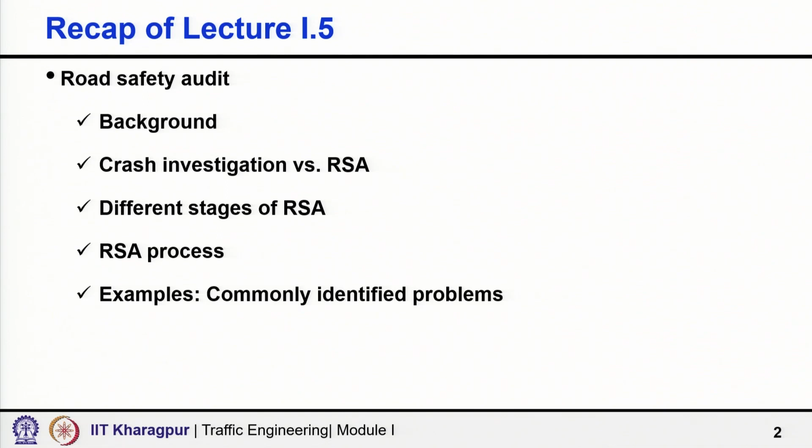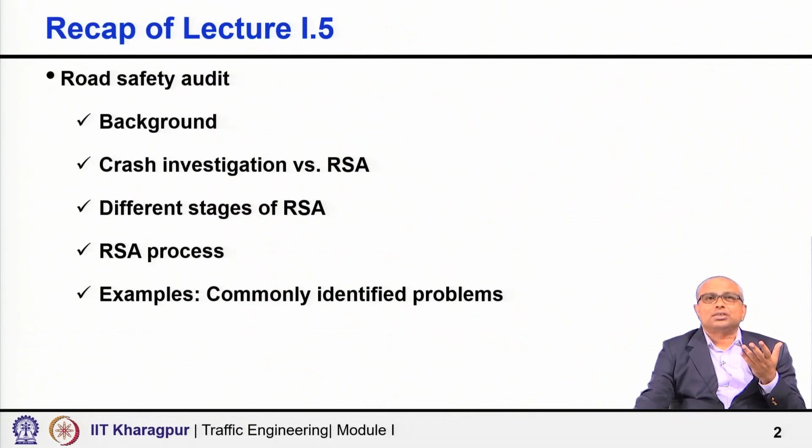In Lecture 5, we discussed road safety audit - what it is, why we need it, the difference between crash investigation and road safety audit, the different stages where road safety audit may be applied, starting from feasibility stage to preliminary design to DPR, during construction, and then operation and maintenance. We also discussed the road safety audit process and indicated some common deficiencies we normally find when we audit roads in India. With this background, today we shall discuss the safe system approach.

A safe system approach within road transportation system is built around the premise that death and serious injury are unacceptable and are avoidable. We are saying that death and serious injury are unacceptable and are avoidable.

Second, it is recognized that road users are human beings and therefore they inevitably make errors. All of us make errors, and such errors may also lead to a crash. But the human body can only withstand a certain level of kinetic energy before a crash results in death or serious injury. So first point: fatality and serious injury, particularly leading to permanent disability, are not acceptable and may be avoided.

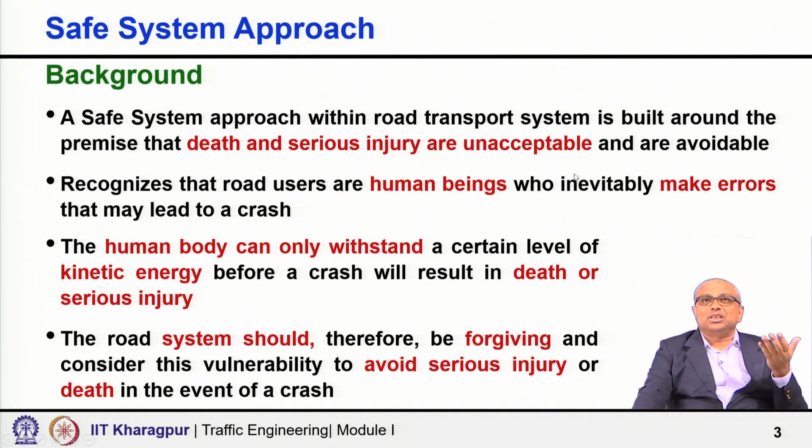Second, accept that humans make mistakes. Third, humans are vulnerable - only a certain level of kinetic energy can be tolerated when a crash occurs, to decide whether fatality or major injury will result. These three I mentioned in the first slide itself: human beings make errors, the human body can withstand only a certain level of kinetic energy before a crash results in death, and death or serious injuries are unacceptable. So these are the first three.

Fourth, responsibility is shared. What do I mean by that? All stakeholders together must ensure that crashes do not lead to fatal or serious injuries. We cannot simply blame the road user - saying it's the road user's fault, so he or she died. We cannot say that. Yes, it is obviously the responsibility of the road user - if you are a driver, it is your responsibility to drive safely, following the rules and regulations, speed limits, with a proper driving license. The same is true for a pedestrian as well.

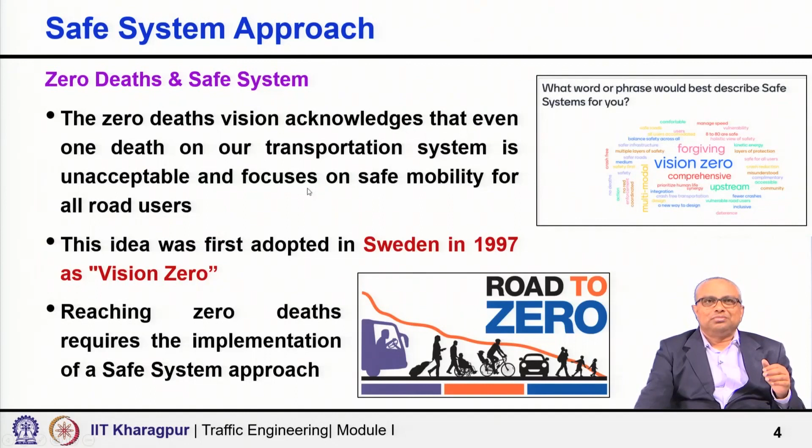Last, redundancy is crucial. What do I mean by that? Reducing risk requires that all parts of the transportation system are strengthened, so that if one part fails, the other part still protects people. That is why it is called a system - everybody together, like a team.

I should give driver training properly and only then hand over the license to a driver. So driver training has to be proper, enforcement has to be proper, road design has to be forgiving in nature, post crash care has to be excellent. Only when multiple things fail does fatality happen. Otherwise, if the driver is not proper, the road will take care of it. If the road is not so good, maybe enforcement can take care of it. Even if a crash occurs, maybe speed management should have taken care of things. Even if a crash occurs, immediate post crash care could save the life.

So redundancy is crucial. Reducing risk requires all parts of the transport system to be strengthened, so that if one part fails, the other parts still protect people, and at the end of the day we are able to achieve a state where, eventually in the long run, we eliminate fatality and serious injury.

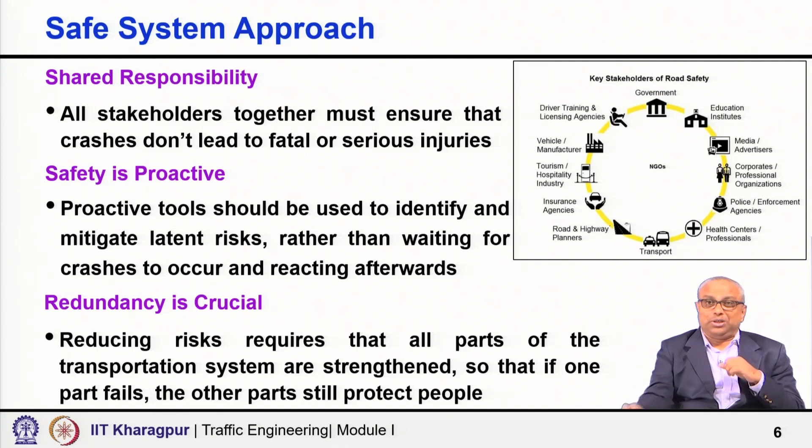A quick comparison between the traditional approach and the safe system approach. The traditional approach, directly or indirectly, assumes that traffic deaths are inevitable - we forecast fatality and how fatal accidents change with various factors. Of course there could be other reasons for doing such forecasting or modeling, so please don't take my statement negatively. But it's as if deaths are inevitable - people say drivers are unruly, pedestrians do not know anything, and in this system obviously deaths are inevitable.

Some deaths will occur, but the safe system approach, or Vision Zero, considers that traffic deaths are preventable. The traditional approach attempts to prevent crashes, fine, but the safe system approach prevents fatalities and serious injuries - even if a crash occurs, it should not lead to fatality or serious injury. The traditional approach considers improving human behavior; the safe system approach says design the system for human mistakes or limitations, and create infrastructure which is forgiving in nature.

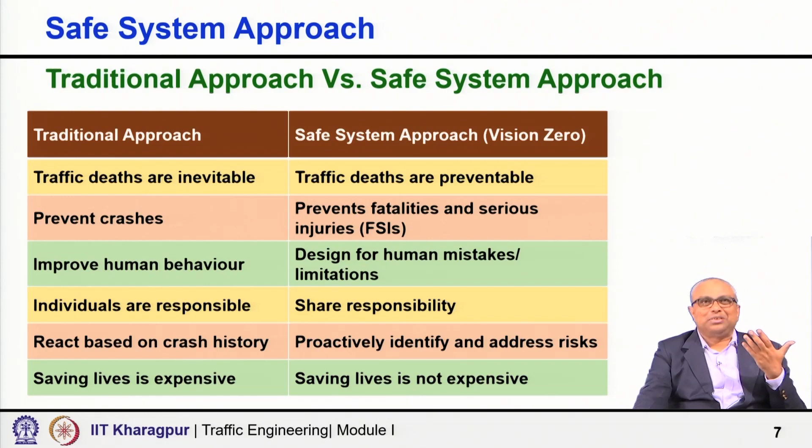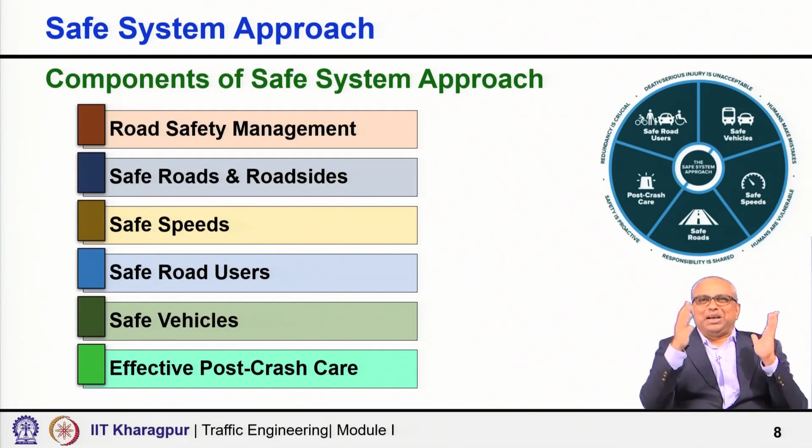Coming to the next, what are the components of safe system approach? There are traditionally 5 pillars, 5 major components. Recently, people also consider road safety management as another component, which in some way integrates all the 5 components together. Traditionally people consider 5 elements: safe roads and roadside, safe speeds, safe road user, safe vehicle, and effective post crash care. These are the 5 fundamental components, and overall road safety management can be considered as a bigger umbrella.

Coming first to road safety management, it is the key enabler for delivering safety interventions. Certain key elements of good practiced road safety management may include, for example, adopting a safe system approach to addressing road safety. The whole approach, the overall team, is working based on the safe system approach.

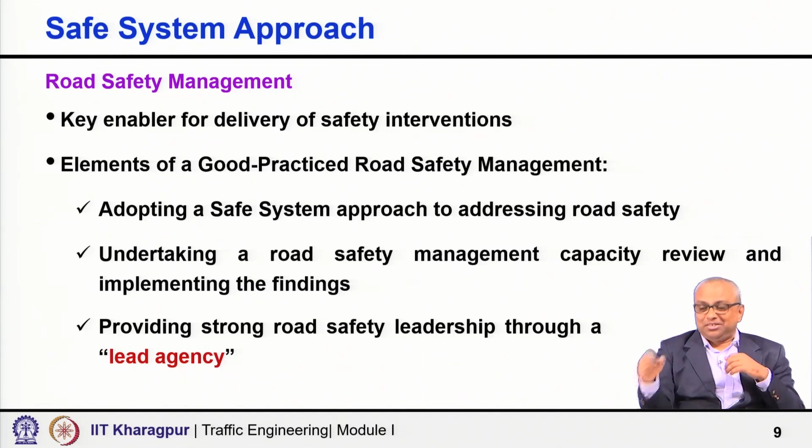Second, undertaking a road safety management capacity review and then implementing the findings. Third, providing strong road safety leadership through a lead agency. If you go state wise, every state, it is a joint responsibility. Multiple departments of government are involved—health, education, transport, enforcement. Road development departments also, may be urban development authority, public works department, so many others, panchayat and rural development department, they also build roads in many states in India. But we need a strong lead agency, so providing strong road safety leadership through a lead agency is very important.

Establishing a road safety management framework with key performance indicators, clearly identified, including the requirements for data collection strategies to effectively plan and monitor road safety activities and outcomes. All stages—data collection strategies, effective planning, monitoring—everything is included. Also building road safety capacity across the sectors, and finally, developing and adopting ambitious strategies and road safety targets with regular reporting on progress. We need to set targets, but only setting targets will not help. There should be a strong leadership, a lead agency must lead it, plan it, monitor it, and regularly review the progress, whether we are able to really achieve it.

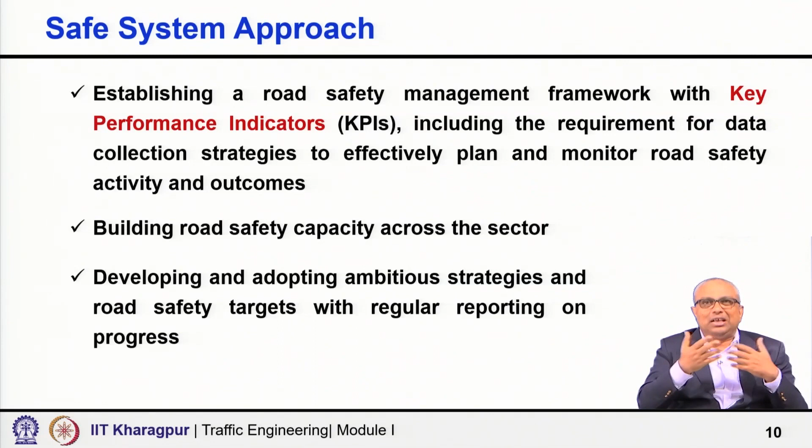Next, safe roads and roadsides—infrastructure interventions to improve safety outcomes by eliminating fatalities and serious injuries. We want infrastructural interventions, what all we can do with the roads and roadsides to ensure that we eliminate fatality and serious injury, all infrastructural interventions to create safe roads and roadsides for all road users.

So basically designing to accommodate human mistakes and injury tolerance—we say infrastructure itself has to be forgiving in nature. We cannot say that we have simply built the road, the blacktop surface is very good, pavement condition and geometry are good, and I have done my job. No, we have to ensure that we are creating safe roads and roadsides. The road development agency cannot think it has done its job just because it built the road. The engineering part, creating good pavement and surface condition, is not the only thing. We have to think of road users, all age groups, and their safety.

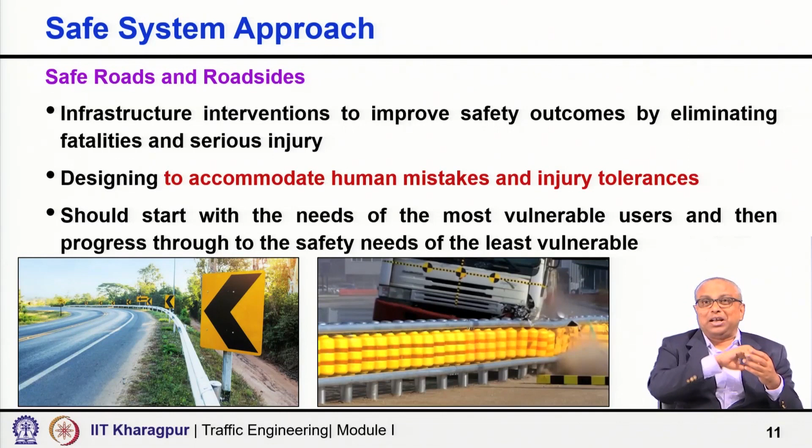This could be a challenging task, especially in low and medium income countries, because we have a diverse traffic mix, low user compliance level, and different multiple authorities having their own power—police may do something, transport department may do something, local authority or local administration may decide to do something, multiple levels of hierarchy, very difficult and challenging. But we should be able to address those challenges effectively to create a better and safer road environment as per the safe system approach, if we want to reduce road fatality and improve the country's performance.

Several examples are there, we will discuss in more detail. I have one more lecture where some interventions will be shown. But here are some quick examples. What could be interventions related to safe road and roadside? Many things are possible; I have mentioned a few here.

Roadside and central barrier systems on high speed roads - the moment we think of high speed roads, we must have these barrier systems. Then physically separating vulnerable users from other road users. We know the human injury tolerance criteria, so how we can segregate, create footpaths, walkways, safe walkways, segregated walkways, safe crossing facilities. If there is a bus stop, how will people cross? If there are market areas, people will walk, use bicycles. So physically separating vulnerable users from other road users - any intervention will come under this category.

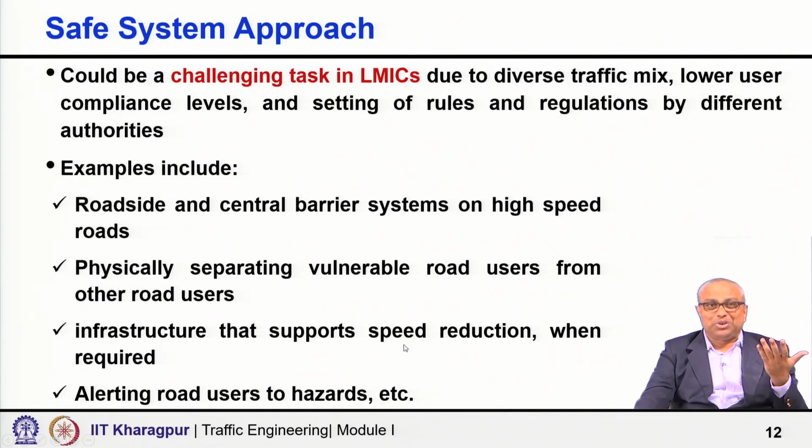Next, safe speeds - very, very important. Humans are unlikely to survive high speed crashes, as I mentioned with human injury tolerance. All over the world, people are recognizing and accepting this.

Reducing speeds can accommodate human injury tolerance in three ways. First, reducing impact forces - obviously if speed is reduced, the impact force is less. Second, providing additional time for drivers to stop - I see an object, want to stop, I get additional time. Third, improving visibility. Particularly in the Indian context, where anywhere and everywhere people are crossing the road, and school children may come straight onto the carriageway or try to cross without looking at traffic - a driver has to be vigilant about the roadside and environment. So reduction in speed can help there.

Also, depending on the impact speed, the death risk, serious injury risk, and slight injury risk will change. You can see that as speed increases, the death percentage risk is increasing. So higher speed means higher fatality - directly related. From 30 to 60, the percentage risk increases from 10% to 95%.

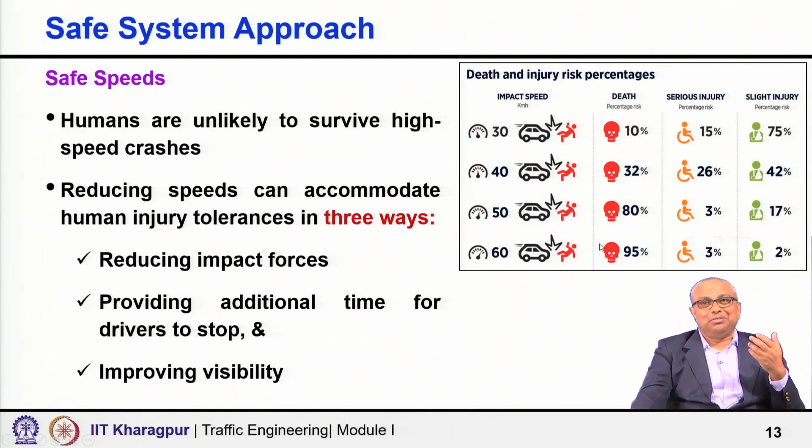Just imagine a single factor so powerful - we must recognize this. There is a direct causal link between speed and safety outcomes. Here too it is shown: fatal crashes, serious injury crashes, minor injury crashes - you can see the maximum gain we can get in terms of reducing the risk of fatality. No other risk factor has such a substantial and pervasive impact on safety as speed. It impacts both the likelihood of a crash occurring, which also gets reduced, and the severity of the outcome, which is again very important.

If infrastructure cannot be improved in the foreseeable future and a road has high crash risk, then managing speed can be a crucial alternative. So design the roads and make all features such that traveling at higher speed is not even possible. If you cannot do that, then speed management, supported by appropriate and competent enforcement to ensure compliance, is very crucial - because it can bring a lot of benefit, especially in reducing fatal accidents, or even reducing fatality.

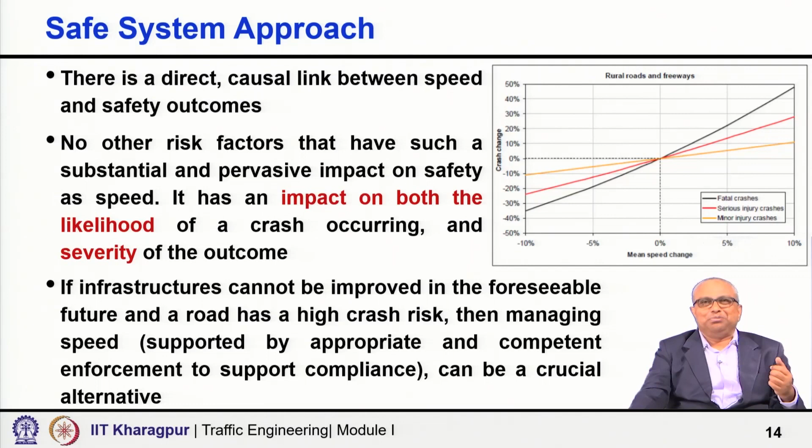Next third, going to safe road users. The safe system approach addresses the safety of all road users, including those who walk, use bicycle, drive, ride transit, or even travel by other modes. Safety for all road users.

Now, maximizing road users' behavior that is compliant with road rules is an important issue. Human errors, rather than deliberate illegal behavior, is an important contributor to fatal and serious crashes. The illegal behavior or deliberate violation is one part of it, handled through enforcement, but human error is slightly different. The problem exists in both forms - human error and illegal behavior - both exist.

Now, we need to take measures to reduce the prospect of human error. Appropriate measures need to be taken to guide use of the network.

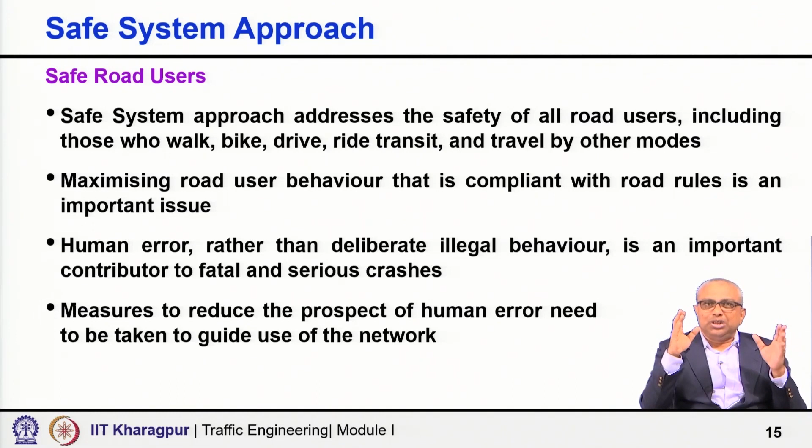There are several methods for improving road user behavior, which may include implementation of proper driver licensing, proper training, education, enforcement, monitoring - for example through vehicle telematics - and road safety campaigns.

But remember, as per the safe system approach, we should not only focus on driver education and awareness. Yes, it can bring some benefit in some cases, but other things are equally important - creating infrastructure to influence human behavior, and influencing behavior through technology and enforcement, is much more effective. But yes, drivers should know - we cannot ignore this part entirely.

If you look at the traditional way driving licensing has been done in many low and medium income countries, it has been used just as an instrument for employment generation, not education and knowledge and skill - the driving licenses have been given largely as a skill development activity, how to operate steering or gear or clutch. But I am driving on a public road where other road users, vehicles, pedestrians, and bicyclists are there. It is very important for me to know all the rules, regulations, and safe driving tips.

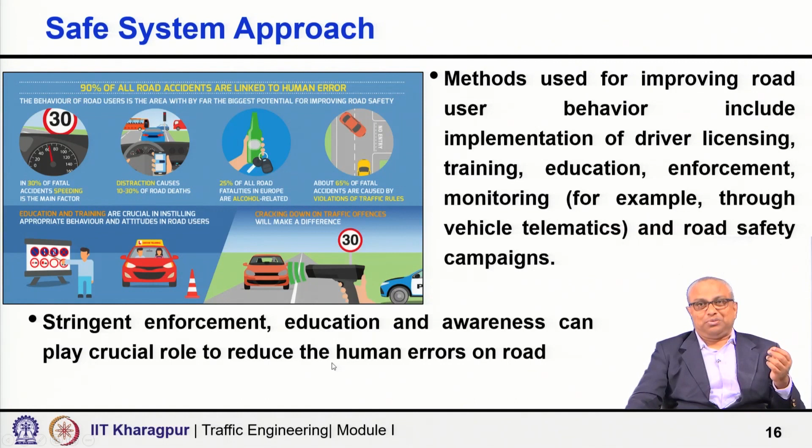Then safe vehicles. Vehicles are designed and regulated to minimize the occurrence and severity of collisions using safety measures that incorporate the latest technologies, and road safety agencies must promote the benefits of safety features and overall vehicle safety level.

Unfortunately, vehicles in low and middle income countries are in many cases deficient. Vehicle manufacturers want to bring down the price to make things competitive, but many times they cut safety features - that is a major concern.

So safe vehicles are also important, as are safe infrastructure, safe drivers, and efficient enforcement. As I said, in the system approach every component has to work. If the vehicle design is proper, if it is a safe vehicle, naturally fatality will come down. Vehicles also have a role to play, which we must recognize - we cannot only blame the road agency, road development authority, or the police. Vehicles are important too. So many opportunities for improvement still exist in the vehicle safety features available in LMIC markets.

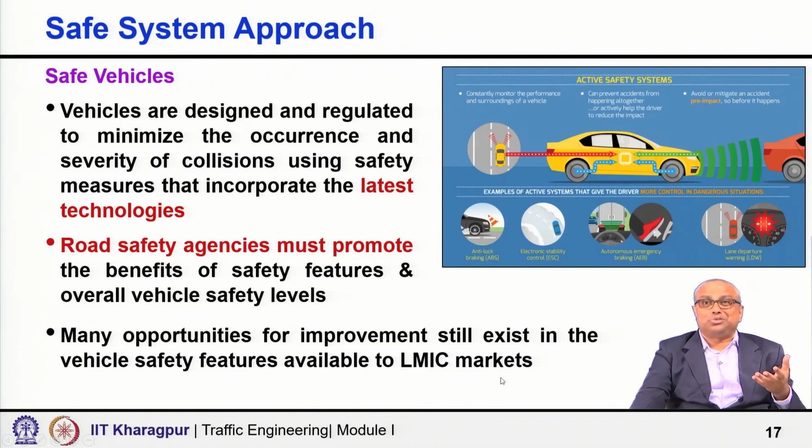People need to be aware, and government also has a role to play, that vehicles should not be allowed which have compromised road safety features.

Last but not least, a very important thing: effective post-crash care. When people are injured in a collision, they rely on emergency first responders to quickly locate them. If a crash has happened, people expect that others will locate them as quickly as possible, help stabilize their injury, and then transport them to medical facilities. This is very important.

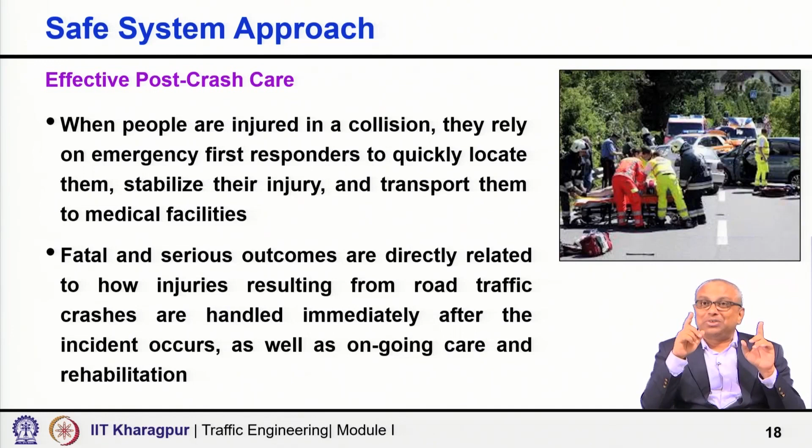All other components are important, but this is also important for saving life and avoiding fatality or major injury. Fatal and serious outcomes are directly related to how injuries resulting from road traffic crashes are handled immediately after the accident occurs, as well as ongoing care and rehabilitation.

Through all these, a lot of benefit in terms of reducing fatalities is possible. Improving the effectiveness of post-crash response care may include multiple things. First, training of first responders, including community members. Sometimes on highways in our country, other drivers are the first visitors at the crash spot, so community members, drivers, and emergency medical staff need training on how to handle and remove an injured person. One has to learn that, because the wrong way of removing a person may cause permanent disability. So they should be trained, and the training needs to be comprehensive and must follow best practice principles.

Second, provision of adequate equipment for emergency response units and trauma units within hospitals. You transfer the patient, but if the hospital is not equipped with everything required to treat such accident victims, then nothing is going to happen at the end of the day. So this is also very important.

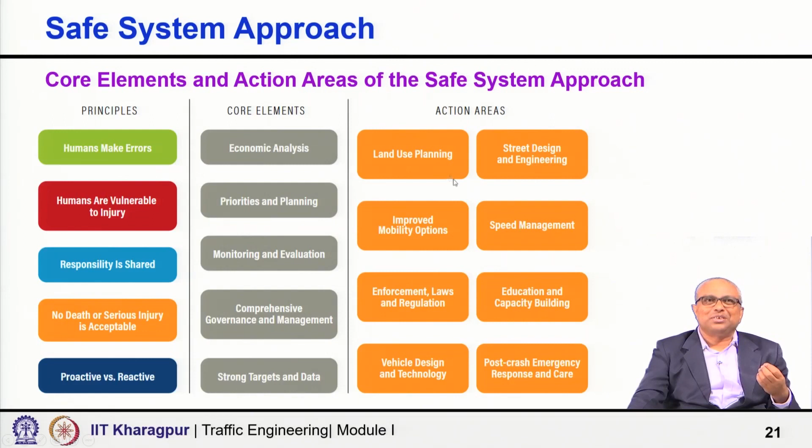Here I have shown another representation of the core elements and action areas of the safe system approach, building on the principles already mentioned - starting from land use planning to street design and engineering, speed management, improved mobility options, enforcement law and regulation, education and capacity building, vehicle design and technology, and post-crash emergency response and care. These are all different action areas, and this is another interesting representation I wanted to include under core elements and action areas.

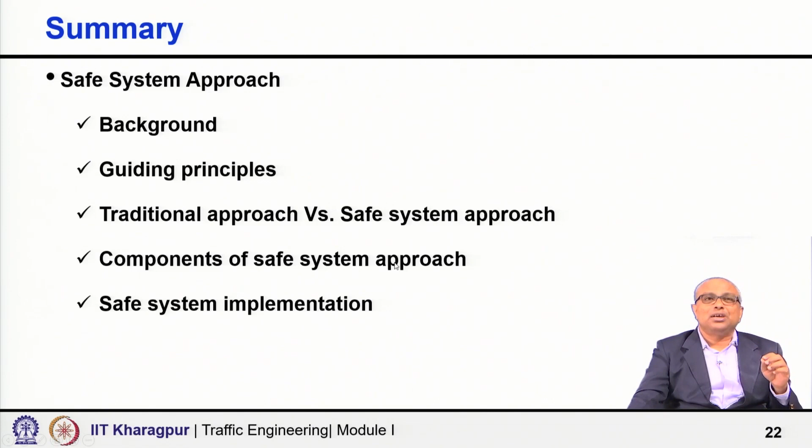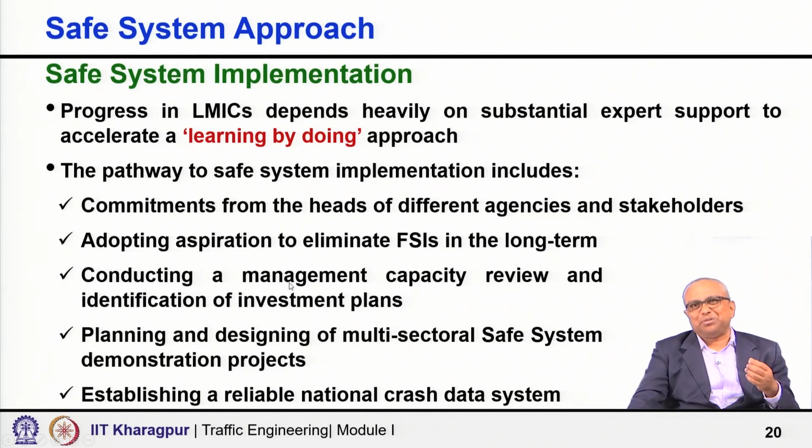So what we discussed focused on the safe system approach: what is the safe system approach, what are the guiding principles, how the traditional system and safe system differ, what are the key differences, and what are the components of the safe system approach. We discussed and addressed each component a little bit, and last is safe system implementation, which I showed you - the pathway to safe system implementation and what are the necessary elements.